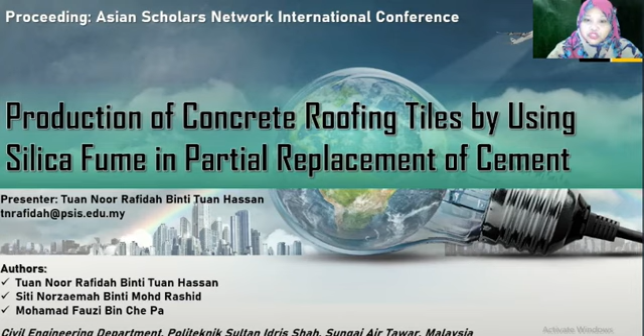As for introduction, as we know, nowadays building materials have undergone a lot of modification from ancient times until the transition to the present age of technology. Furthermore, in today's era of technology, everyone wants an affordable and comfortable home.

Therefore, every scientist and engineer works hard to develop and use new materials for the construction of buildings that are durable and cost-effective. It is generally known that building materials are composed of roofing sheet, block, concrete, clay, stone, sand, gravel, roofing tiles, steel, fine aggregate, coarse aggregate, and others.

Besides, in the current construction of buildings, cement and concrete are vital components. There are many environmental advantages of using concrete, including durability, longevity, heat storage capability, and chemical inertia.

However, cement is among the most energy-intensive materials used in the construction field and a major contributor to carbon dioxide (CO2) in the atmosphere. Therefore, in order to reduce the environmental impact to the minimum possible, the quantity of concrete used in the building should be reduced.

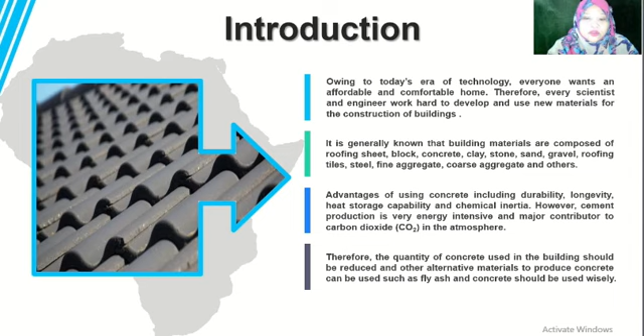In addition, other alternative materials to produce concrete can be used, such as fly ash, and concrete should be used wisely. Let's proceed to the literature review.

Generally, as is well known, cement and concrete are essential to the infrastructure of the modern world. No other material is able to fulfill the growing demand for building materials with such a low environmental footprint. Its widespread availability and low cost make cement by far the most used material on earth, with reinforced concrete accounting for more than half of all manufactured materials and products.

It is only because of these enormous volumes that overall the production of cement and concrete is estimated to account for around 5 to 8% of man-made CO2 emissions, which is called carbon dioxide.

Cement manufacturing requires huge amounts of non-renewable resources like raw materials and fossil fuels. It is estimated that 5 to 6% of all carbon dioxide greenhouse gases generated by human activities originates from cement production. Besides, raw material and energy consumption also results in emissions to air, which include dust and gases.

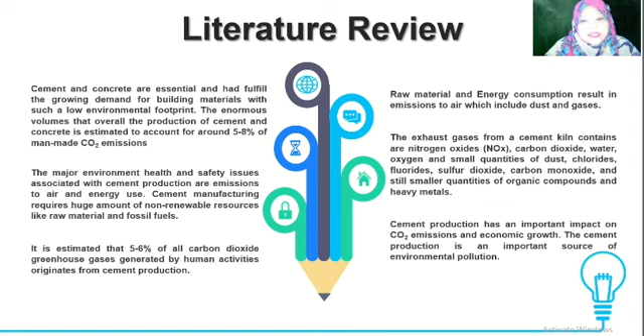Cement production has an important impact on carbon dioxide emissions and economic growth. The cement production is an important source of environmental pollution. The results of the studies also found that the USA and China have a global responsibility for cement production, determined as one of the central sources of carbon dioxide emissions.

In a rapidly growing world, roof tiles are important components to provide shield from rain and heat of the sun. Traditionally, most roof tiles are made from clay or slate. However, nowadays, roof tiles are also made of concrete materials.

Mixes of concrete come from admixture of sand, cement, and water. But there are few disadvantages of concrete roof tiles, such as the concrete tiles being easy to break, especially when the workers do the installation of concrete roof tiles at the construction sites. The use of cement is also high in producing roof tiles, which can contribute to high costing in the construction work.

Therefore, since cement is the most consumed human-made material, several byproducts such as fly ash, slag, and silica fume are effectively being used in the daily production of concrete as partial cement replacement to reduce CO2 emissions. The use of silica fume decreases the permeability, thereby increasing the resistance of concrete against corrosion, improving its strength and durability.

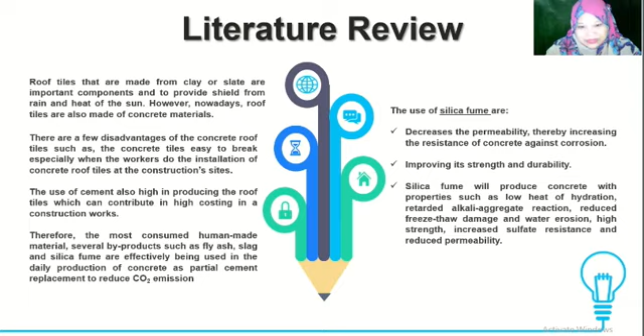According to Sobolev and Batrakov 2007, the use of silica fume will produce concrete with properties such as low heat of hydration, retarded alkali aggregate reaction, reduced freeze-thaw damage and water erosion, high strength, increased sulfate resistance, and reduced permeability. Let's proceed to the methodology.

For this research, concrete roof tiles are made of a mixture of sand, cement plus silica fume, and water, molded under heat and high pressure. The mixed ratio used is 1.5 to 1, sand to ordinary Portland cement (OPC). There are 72 samples produced with 3 different ratios for silica fume: 5%, 10%, and 15%.

The testing conducted in the manufacture of roof tiles included surface quality, drying time, paint impact, strength, water absorption, water permeability, acoustic insulation, as well as thermal insulation.

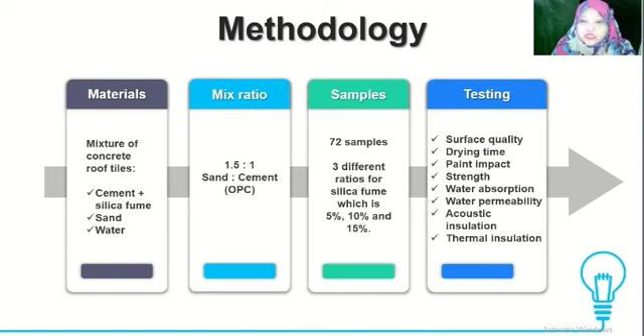Let's proceed to the results and discussions. Let's go to the first test, which is the surface quality test.

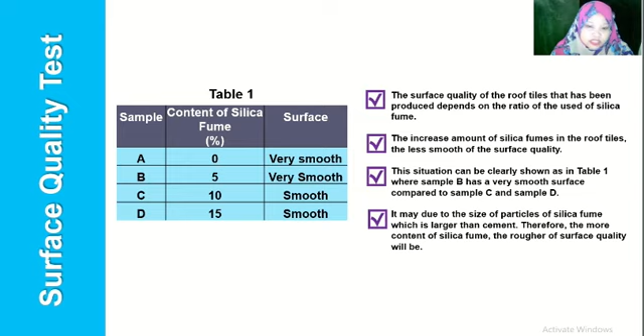Table 1 shows that the surface quality of the roof tiles produced depends on the ratio of silica fume used. The increased amount of silica fume in the roof tiles results in a less smooth surface quality. This is clearly shown in table 1, where sample B has a very smooth surface compared to sample C and sample D. This may be due to the particle size of silica fume, which is larger than cement. Therefore, the more content of silica fume, the rougher the surface quality will be.

Let's proceed to the second test, which is the drying time test. After 24 hours from making the roof tiles, the percentage of water in the roof tiles was measured using a protimeter to check the time required for drying. All 3 roof tiles of each sample were measured to take the average percentage of water.

The average percentage of water is shown in figure 1. The result shows that the lowest percentage of water in the roof tiles is sample D, with 15% silica fume, with only 20% remaining after 24 hours. The highest reading is sample B, with 5% silica fume, at 22%, which proves that sample B took a long time to dry. Therefore, it can be concluded that roof tiles with silica fume took a shorter time to dry.

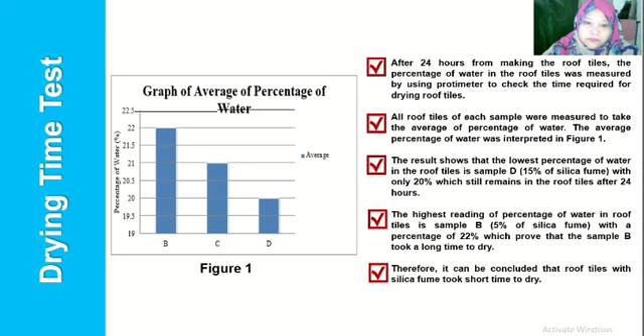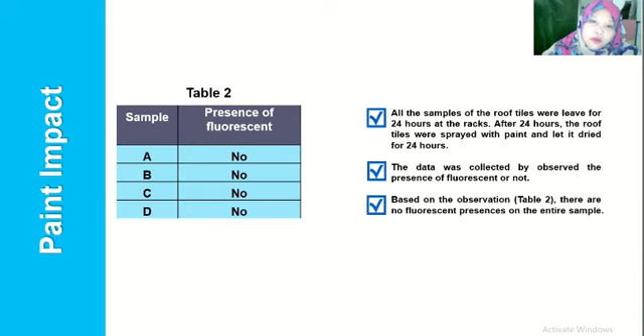Let's go to the paint impact test. All samples of roof tiles were left for 24 hours on the racks. After 24 hours, the roof tiles were sprayed with paint and left to dry for 24 hours. Data was collected by observing the presence of fluorescence or not. Based on the observation from table 2, there was no fluorescent presence on any of the samples.

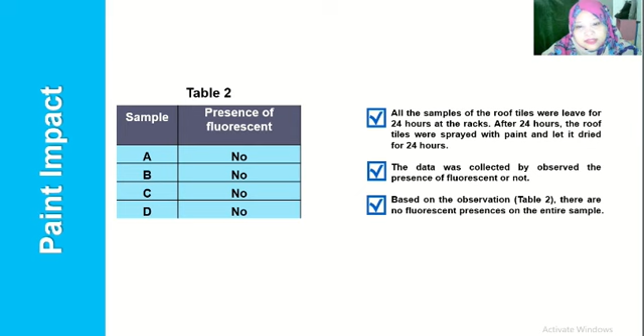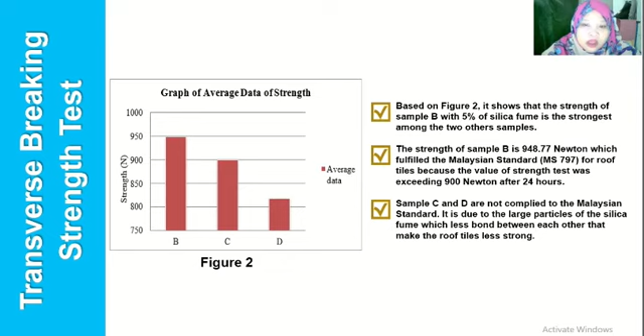Let's proceed to the transverse breaking strength test. Based on the figure shown, the strength of sample B with 5% silica fume is the strongest among the samples, at 948.77 Newton, which fulfills the Malaysian standard MS 797 for roof tiles since the value exceeded 900 Newton after 24 hours. Samples C and D did not comply with the Malaysian standard. This is due to the large particles of silica fume, which bond less with each other, making the roof tiles less strong.

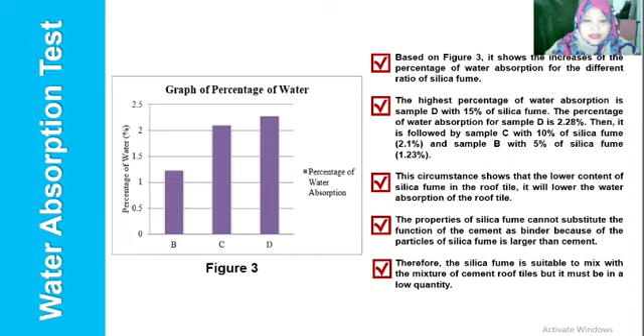This circumstance shows that the lower the content of silica fume in the roof tile, the lower the water absorption of the roof tile. Silica fume cannot substitute the function of the cement as binder because the particles of silica fume are larger than cement. Therefore, silica fume is suitable to mix into cement roof tiles, but it must be in a low quantity. Next is the water permeability test.

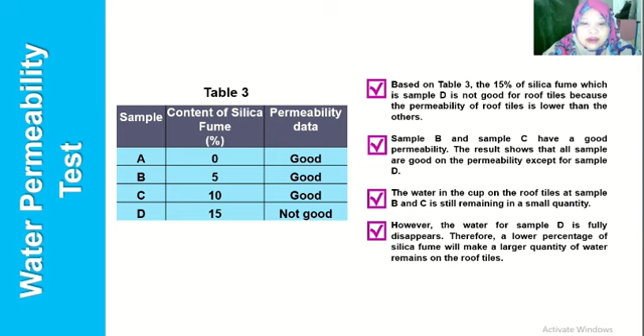The water in the cup on the roof tiles of sample B and C still remains in a small quantity. However, the water for sample D fully disappears. Therefore, a lower percentage of silica fume will make a larger quantity of water remain on the roof tiles. Okay, next is the acoustic insulation test.

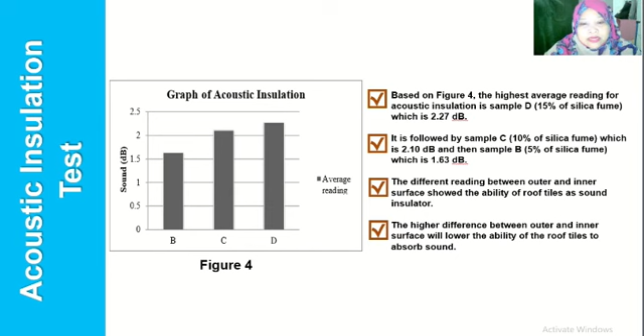The different reading between outer and inner surface showed the ability of roof tiles as a sound insulator. The higher difference between outer and inner surface will lower the ability of the roof tiles to absorb sounds. Okay, let's proceed to the last test for this research, which is the thermal insulation test.

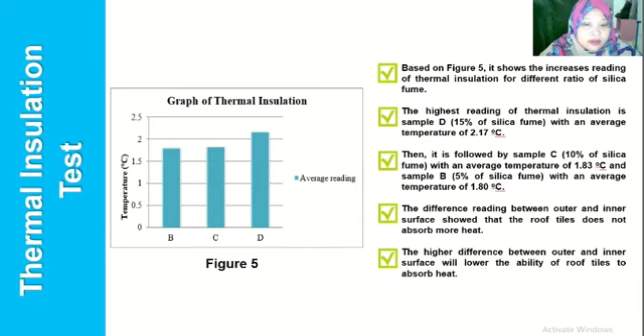The difference in reading between outer and inner surface shows that the roof tile does not absorb more heat. The higher difference between outer and inner surface will lower the ability of roof tiles to absorb heat. Let's proceed to the conclusion.

The most significant result is the mixture of roof tiles with 5% of silica fume, as this proved to be the optimum percentage by the results. As obtained from testing, the surface quality of the roof tile is smooth. Other than that, there is a lower percentage of water in roof tiles after 24 hours. Roof tiles with silica fume do not take a long time to dry. Besides, they can be directly painted after 24 hours without presence of fluorescence.

The roof tiles with 5% of silica fume almost succeeded because the strength is 948.77 Newton, which is the highest result among other samples. A large amount of silica fume cannot replace cement in roof tiles. The result of water absorption with 5% of silica fume is 1.23%, where the standard of water absorption cannot be more than 10%.

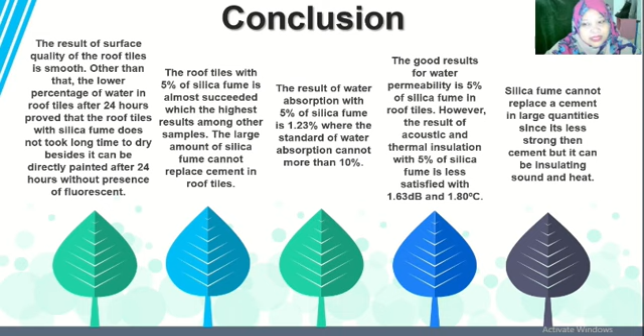Besides, the good result for water permeability is 5% of silica fume in roof tiles, since water does not pass through the roof tiles after 24 hours. However, the results of acoustic and thermal insulation with 5% of silica fume are less satisfying, with 1.63 decibels and 1.8 degrees Celsius. As a conclusion, silica fume cannot replace cement in large quantities since it's less strong than cement, but it can insulate sound and heat.